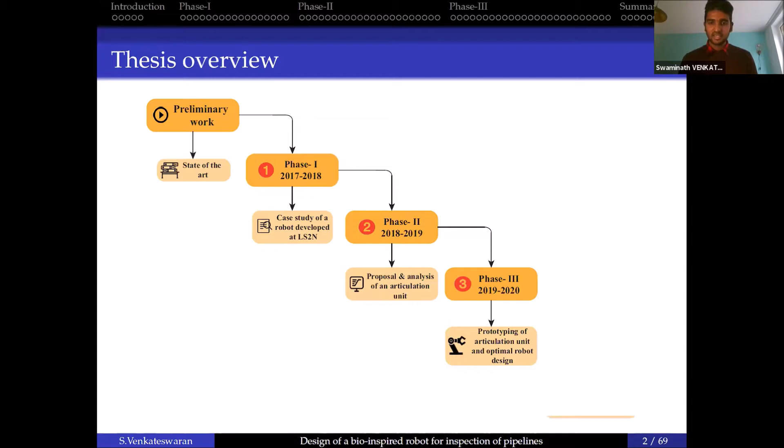This will be the outline of today's presentation. The thesis begins with preliminary work, covering the state of the art and mathematical concepts. This is followed by phase 1, a case study of a robot developed at LS2N in France. Phase 2 concentrates on the proposal and analysis of an articulation unit. Phase 3 concentrates on prototyping the articulation unit and the design of an optimal robot. Finally, the thesis ends with conclusion and future perspectives.

Generally, robots have an important application in industries such as automobile and manufacturing because they not only reduce human effort, but also perform tasks with better accuracy. Even in industries such as nuclear, chemical, and sewage, inspection robots play an important role for pipelines because they can do the task with accuracy, but also reduce long-term radiation effects or even reduce the loss of human life.

Generally, the architecture of a piping inspection robot comprises a head, a platform, and a cable. The head consists of devices such as a camera, and the platform houses all the equipment of the robot. Finally, the cables are used to transfer information from a central control system to the current position of the robot.

In general, a piping inspection robot is encountered by several scenarios such as diameter variation, a 90-degree bend, a 45-degree bend or elbow, a T-union or junction, or even the presence of deposits.

These inspection robots are associated with problems, namely movement inside pipelines—how accurately it's positioned on a given zone—and inspection of the desired zone, or even intervention on the desired zone by withstanding the load of the mounted devices. This thesis will mainly concentrate on addressing the first issue, associated with movement, and will look at the design of an inspection robot for diameters less than 150 millimeters that can adapt its structure to overcome scenario A and potentially overcome scenarios B to D, such as bends and junctions.

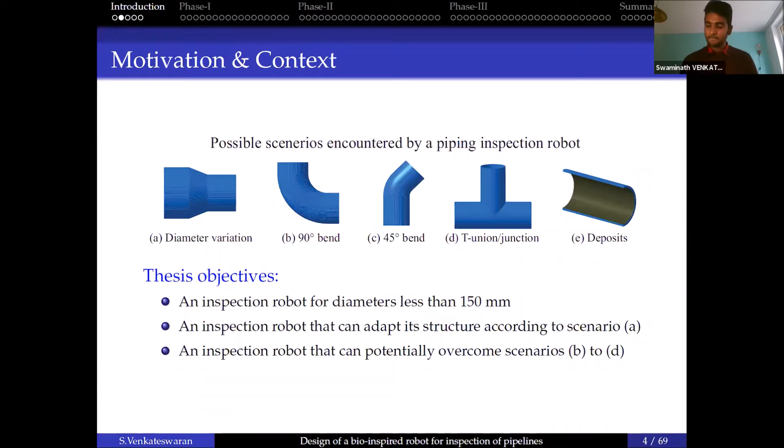Generally, the locomotion techniques of piping inspection robots can be classified via pig type, wheel type, wall press type, or screw type. Another interesting classification was proposed by Kasim, via mechanical and bio-inspired locomotion systems.

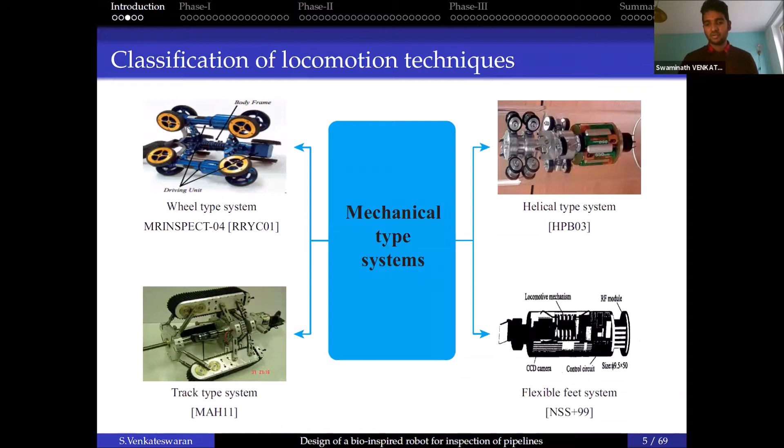Mechanical locomotion systems employ mechanical elements for accomplishing locomotion or contact with the walls of the pipeline. Examples include a wheel type system using wheels to contact pipeline walls, a track type system using a conveyor with pulleys and rollers, a helical type system exploiting screw motion to translate along a given pitch inside a pipeline, or a flexible feet system using a piezoelectric bimorph to accomplish locomotion.

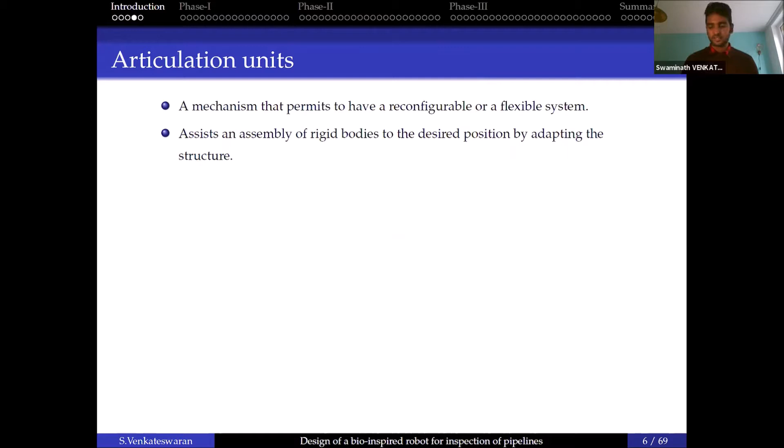And then we have something called articulation units, which is basically a mechanism that can permit a reconfigurable or flexible system. They assist assembly of rigid bodies to move to the desired position by adapting the entire structure. So these are some of the examples.

We have a universal joint, which is quite commonly found in robot manipulators or even piping inspection robots where it's actuated. It can help the assembly overcome a pipe bend at 90 degrees or pass through a junction.

And then we have a passive example like a spring, which is used to bend the entire robot assembly to overcome a pipe bend at 90 degrees, for example.

And then we have a flexible system, which is like the spring, but with higher load carrying capacities. It can be a flexible bearing or a flexible sleeve coupling—again, a passive solution to overcome a pipe bend or a junction.

And then we have another interesting example, which are tensegrity structures that employ bars in compression and springs in tension. They are basically lightweight mechanisms which can manipulate in a given environment or overcome an obstacle.

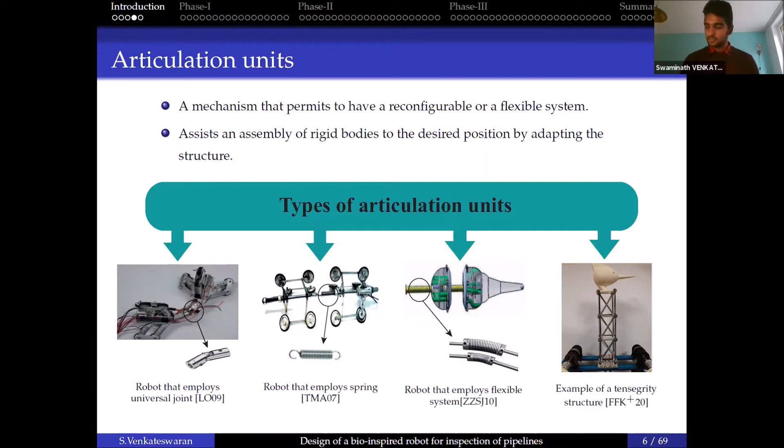Moving forward, phase one of the thesis concentrates on a rigid bio-inspired piping inspection robot, and it tries to address the following questions: how can locomotion be accomplished inside a pipeline, and what are the forces required to have good contact with the pipeline walls?

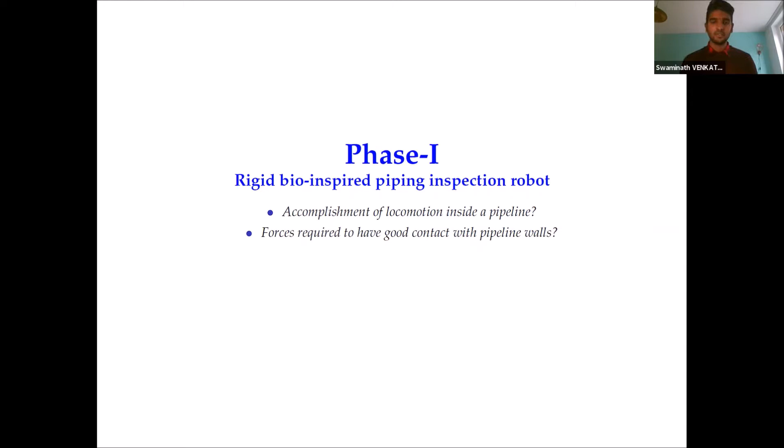In this context, a rigid bio-inspired piping inspection robot that moves like a caterpillar was developed as part of a research project back in 2014 at LS2N. By using leg mechanisms and DC motors, the robot accomplishes the locomotion of a caterpillar in six steps. As you can see, a small simulation here.

The problem is that the robot is a rigid model and cannot be used for pipelines having bends and junctions. Also, the velocities of the motors used are pretty low. Additionally, force models—namely static and dynamic—were not studied, and experimental validation was not carried out. So the last two points will be addressed in this phase of the thesis.

So these are the representations of the various modules on the digital model of the robot. We have rear and front leg modules, which comprise 3 legs at 120 degrees out of phase, and they try to establish contact with the walls of the pipeline. And then a central module, which takes care of elongation and retraction, eventually arriving at the locomotion of a caterpillar.

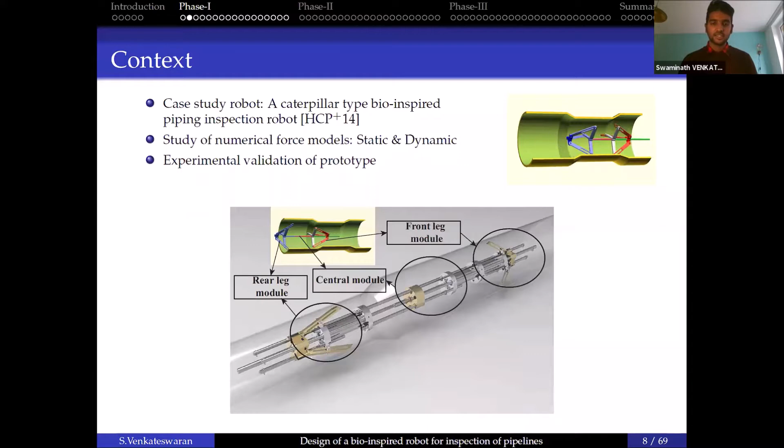Moving on to the force models: basically static and dynamic force models are developed for this robot. Generally, when the robot is under locomotion, we can have 2 types of models.

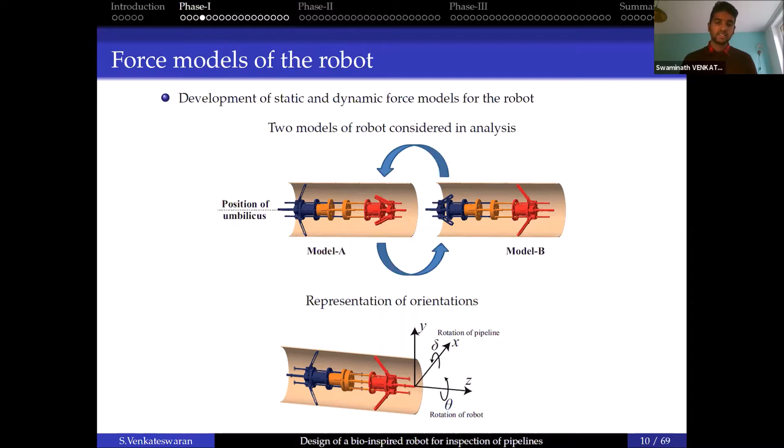For the static force model, we begin with a wrench model, which comprises the force vector and the moment vector. The force vector consists of radial forces and longitudinal forces. For estimating the torques at the central point, we use Varignon's moment transport rule, which states that the total moment acting at a point is equal to the sum of moments at each point.

We estimate the normal forces, which are the contact forces, based on Coulomb's law of dry friction, using the radial and longitudinal forces and the coefficient of friction between bronze legs and steel walls of the pipeline. The actuator forces are then estimated using the force transmission factor relation shown here.

Then we have the dynamic force model, used to estimate the forces on the actuators and the locomotion. The initial analysis was done by Frederick Boyer using the recursive Newton-Euler algorithm. This is the general representation of the various body parts of the robot, comprising around 29 bodies with non-zero masses, active links, passive links, and some clampings.

And this is the bill of materials used, for example steel material for the actuators, bronze for the legs, and copper for the cables.

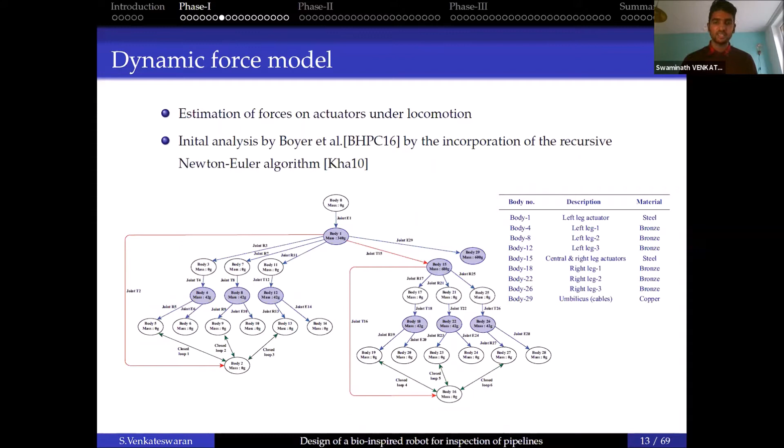Similarly, we have a velocity component equation in the dynamic force model, which is a function of the homogeneous transformation matrix. Then we have a wrench model comprising the forces and moments, which are functions of the inertial matrices. Eventually the motor torques are computed using the wrench model as well as the Coulomb and viscous friction parameters.

Moving to the results, the longitudinal and radial force equations are estimated using software such as Maple. For the simulation, we consider a straight pipeline with two diameters, 54 and 74 millimeters. Here W indicates the self-weight of the robot, measured from CATIA, not taking into account the weight of the cables.

As I said earlier, when one set of leg mechanisms has contact with the pipeline walls and the other end is free, owing to the self-weight of the robot, a moment is induced at the fixed end. This moment is caused by the self-weight of the robot, which acts at a distance of the center of gravity from the clamped end.

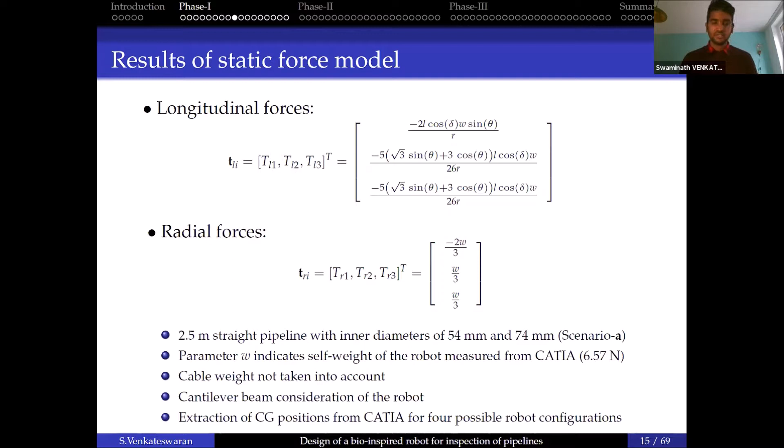We can have four possible configurations of the CG position, measured from CATIA as a function of the diameter of the pipeline, and also as a function of the position of the central actuator, which can be either fully extended or fully retracted. We also calculate the force transmission factor for the two diameters considered, 54 and 74.

For the results of actuator forces, for the smallest diameter pipeline, when the orientation is vertical, the forces are almost constant and pretty low because only the radial forces exist, and the longitudinal forces do not exist because they depend on the orientation of the pipeline.

Whereas if the orientation is horizontal, the highest amount of force was measured on the central actuator extended position, around 70 Newtons, and we observe a variation of this force. It's because of the orientation of the robot about its own axis, which can go from 0 to 2 pi radians. The highest forces were observed on the 74 mm diameter pipeline, because it depends directly on the force transmission factor, with values around 120 Newtons.

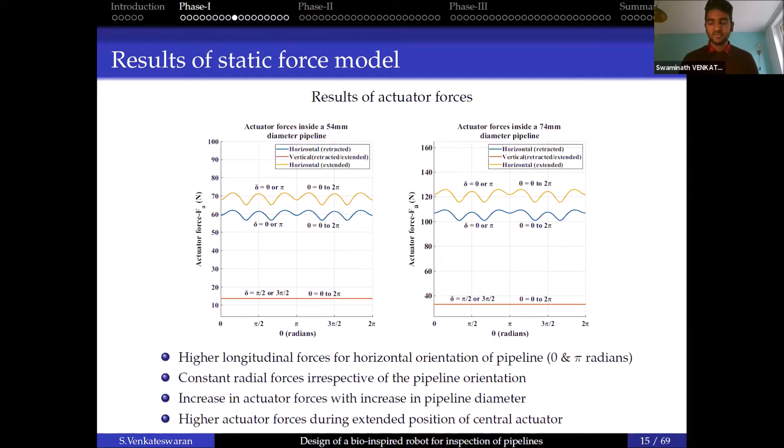Moving to the dynamic force model, trajectory planning is performed using the fifth degree polynomial equation to arrive at the displacement, velocity, and acceleration profiles. The total time taken for the simulation is around 5,500 seconds, owing to the low velocity of the motor units, around 0.43 millimeters per second, and eventually very low values of acceleration.

Then we have the results of forces on each actuator under locomotion. For model A, when the orientation is horizontal, the forces on the central actuator are pretty close to zero, however the leg actuator forces range between -4 and 4 Newtons. It's the same case for model B when the orientation is horizontal.

However, in the case of vertical orientation of the pipeline, the central actuator forces are pretty much on the higher side, around 8 Newton, mainly caused by gravity. But in the case of model B, the forces on the central actuator were around 10 Newton, mainly caused by the presence of the umbilicus that imposed a slight load on the robot.

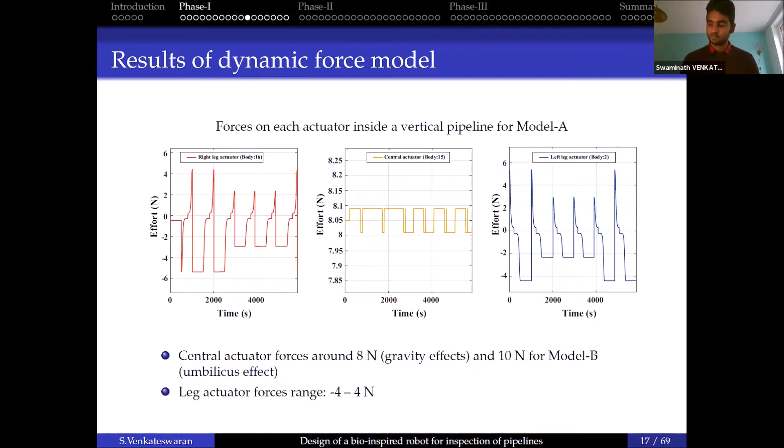However, the leg actuator forces remain the same irrespective of the orientation of the pipeline for the dynamic force model. So to compare, the static forces were found to be pretty much higher than the dynamic model, mainly due to the low velocity of the motor units and low inertia of moving masses.

However, the dynamic model helped in identifying the forces on the central actuator, which was not possible in the static model. The static force model results were then used as inputs for accomplishing clamping phases during the experiments.

A prototype of the robot was realized by assembling DC motors, servo controllers, fasteners, and connecting elements. An interface was established between the servo controllers and motors using a BeagleBone Black microcomputer, where a force control algorithm is written to apply duty cycles using PWM and GPIO cycles.

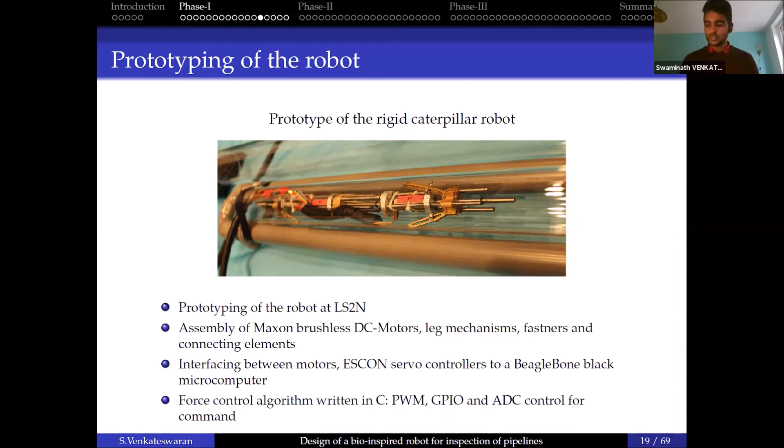We apply a threshold to attain static clamping phases during locomotion. The experiment was carried out inside a 74 mm straight pipe made of transparent PVC material, 2.5 meters long. Initially, output voltages were measured from the ADC and sent to the user, from which we can calculate the current.

It was observed that a lot of noise was present, mainly due to numerical errors associated with the BeagleBone Black card and also some frequency issues. A filtering technique called Savitzky-Golay, which uses a least square approximation to smoothen signals without distorting them, was employed to reduce the noise.

With the current data, we can estimate the torques and forces based on the relation with the torque constant. The spindle drive forces were estimated for horizontal and vertical orientations of the pipeline.

It was found that at the starting and ending of each phase, higher forces were observed, mainly because a constant velocity profile was employed in the control law. Also, slightly higher forces were observed in the vertical orientation of the pipeline, mainly due to the effect of gravity.

Using the actuator forces, we can calculate the clamping force based on the relation with the Jacobian matrix, and it was found to be around 630 newtons, which was pretty much higher than the static model.

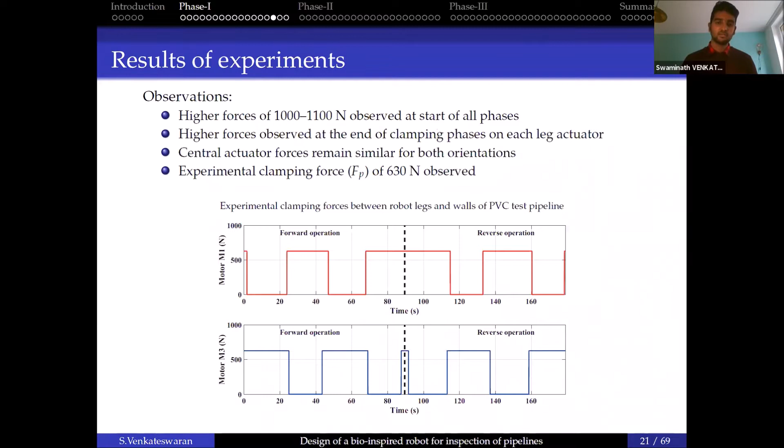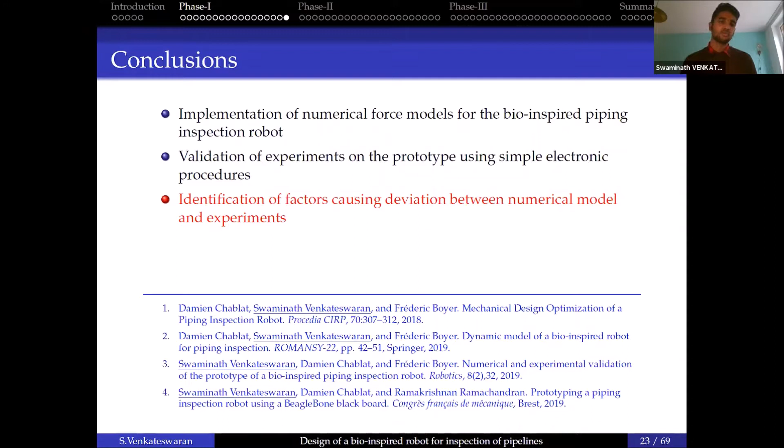Some factors were identified that caused deviation between the numerical and experimental results, mainly due to electromechanical and frictional effects, which were not possible to consider in the numerical model.

It was also possible to identify a robot which can potentially operate within a pipeline having diameters less than 150 millimeters. Below you can see some contributions at the end of this phase.

Moving forward to phase 2, it concentrates on the design and analysis of a tensegrity mechanism, and it tries to address questions like: what are the issues to overcome a pipe bend and junction, and what is the design of an articulation unit that can have stability and considerable tilt limits?

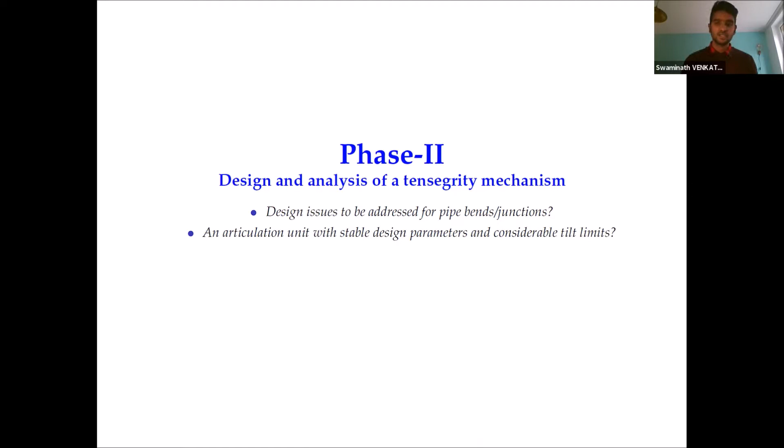As said earlier, the problems with the existing prototype are rigidity, unaddressed cable management issues, and low velocity. In this phase, we try to address the issue of rigidity by converting the system into a flexible system through the design and analysis of an articulation unit.

Before going into the design, some factors must be considered for overcoming pipe bends and junctions. The first is passive compliance, imagined for a robot passing through a 90-degree pipe bend, where it is essential for the articulation unit to be in passive mode. Then there is active compliance, imagined for a robot passing through a T-union or junction, where the articulation unit must be necessarily actuated.

Then we have the tilt limits: the maximum angle up to which the robot's articulation unit can bend to overcome a pipe bend or junction.

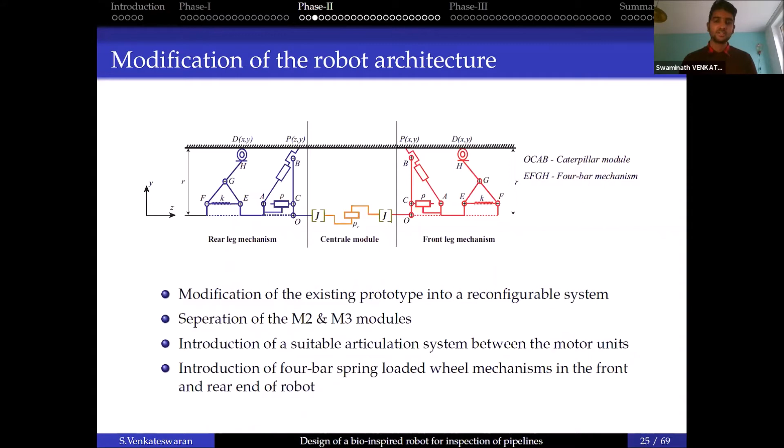So the existing architecture of the robot is modified into a reconfigurable, flexible system by incorporating articulation units between each module, and also a 4-bar wheel mechanism was proposed for the front and rear ends of the robot, which can potentially assist it to enter and exit pipe bends smoothly.

Taking into account all these factors, a tensegrity mechanism employing 3 tension springs and a universal joint was proposed as an initial solution for an articulation unit for the bio-inspired robot.

Under passive mode, the mechanism will operate autonomously to overcome a 90-degree pipe bend. In the case of active compliance, cables passing through each spring of the mechanism can be actuated to tilt the platform of the mechanism to overcome a pipe bend or junction.

This mechanism is correlated to a 3-SPSU parallel manipulator to arrive at the geometrical equations, and two analyses are being carried out. The first one uses the theory of tilt and torsion to analyze the joint limits, and the next one concentrates on the study of singularities and workspaces for the Euler angles of the universal joint.

The first concept concentrates on the theory of tilt and torsion, which is employed in parallel kinematic machines where the mobile platform is usually symmetric. So by projecting the tilt and azimuth angles of the universal joint, the transformation matrices are determined.

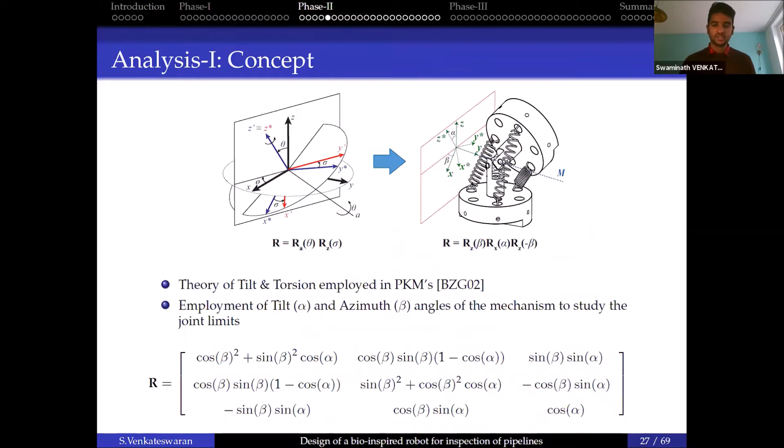Since we have a parallel mechanism, the inverse kinematic problem is pretty much simpler, which is used to map the base to the end effector by using the distance relations. So these are the results of IKP for the theory of tilt and torsion.

For the positioning of the end effector about the central axis of the universal joint, it is affected by the value of parameter gamma, based on which we can have three steady postures.

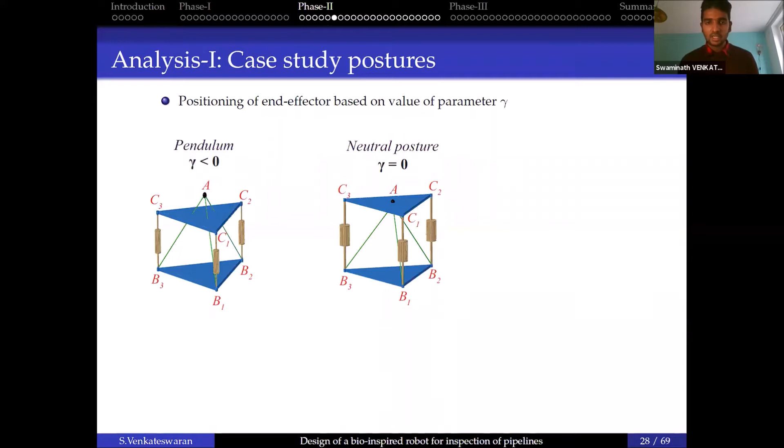The first one is called the pendulum, where the value of gamma is less than 0, or negative. The next one is called the neutral posture, where the value of gamma is 0. And the next one is called the inverse pendulum, where the value of gamma is greater than 0, or positive.

For the analysis of this mechanism, we use the Siropa library of Maple to create the manipulators, transform the inverse kinematic problem into constraint equations, and extract feasible workspaces using CAD. CAD is an important tool employed for symbolic computations in the field of engineering and mathematics, and it comprises decomposition of space into a collection of cells and projection of each cell for a given variable, where each cell is described by a set of polynomial equations.

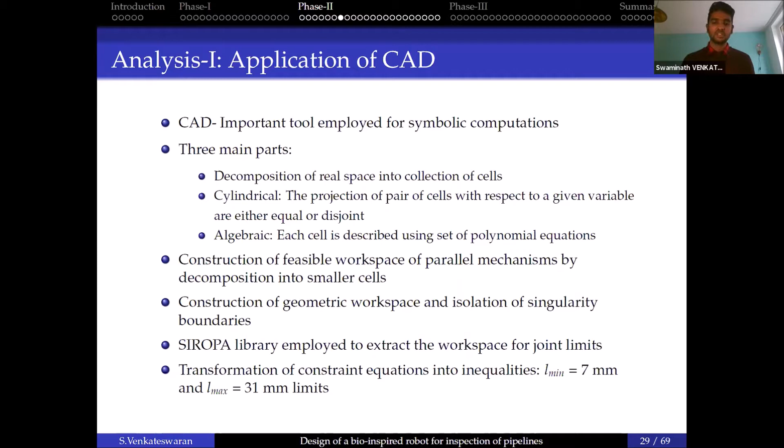For parallel mechanisms, these tools are used to study the feasible workspaces and also isolate the singularity aspects. The constraint equations are transformed into inequalities using Siropa by setting joint limits that go from 7 millimeters to 31 millimeters. So these are the results obtained.

For the pendulum configuration, the value of alpha is around plus or minus pi by 18 radians, which is very narrow. However, in the case of neutral pose, the results are considerably better, around plus or minus pi by 6 radians. And in the case of inverse pendulum configuration, the results are even better, found to be around plus or minus pi by 3 radians.

So we just stick with the inverse pendulum configuration for further analysis.

This is a small simulation of the theory of tilt and torsion on the three configurations. As you can see, a tilt is applied, an azimuth from 0 to 2 pi to have a complete rotation. And once again, another tilt and an azimuth to rotate the mechanism.

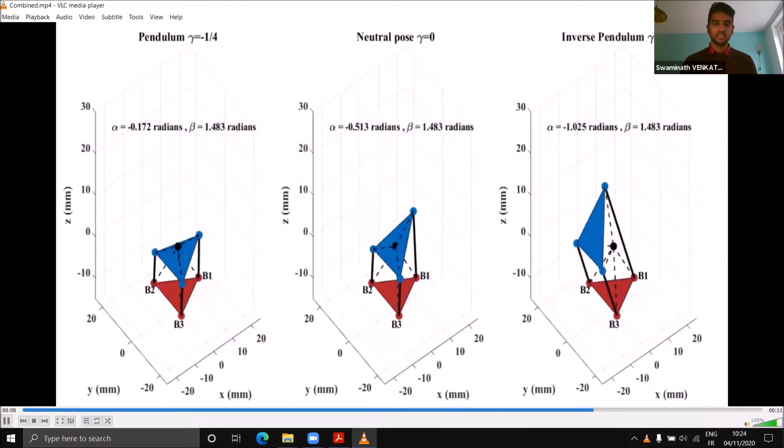Since an inverse pendulum configuration was chosen, by nature the inverse pendulum is unstable. So in order to ensure that we have a stable configuration, stability analysis must be done, for which the Lagrange equation of motion is used under static modes.

Under static modes, it's only the potential energy that exists, and it is mainly contributed by the presence of cables and springs. So in order to have a stable condition, the second order derivative of the potential energy, also called the mechanism stiffness, must be positive.

Initial analysis was done by considering fixed design parameters, such as the value of H fixed at 1, and it was found that an unstable configuration was obtained.

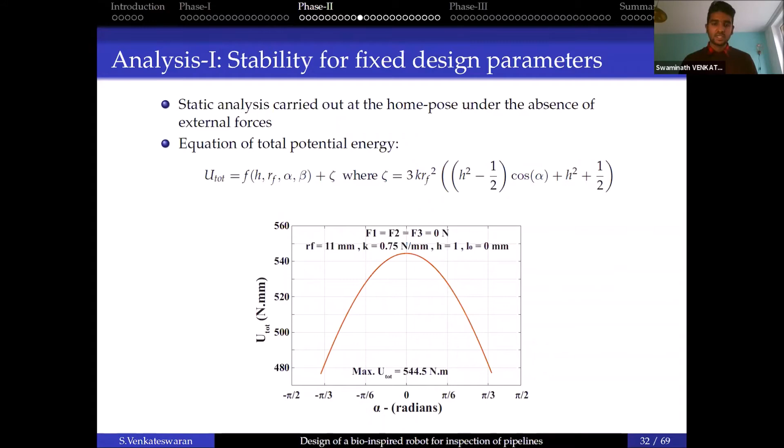For finding the stable configuration, the second order derivative of potential energy is studied at the home pose, where the tilt angles are 0. A trace is created between the mechanism stiffness parameter H and the value of RF. The value of H equal to 0.5 is chosen from the trace, where a stable configuration could potentially be obtained. The workspace analysis is then re-verified, and the tilt limits are seen to be considerably reduced, from pi by 3 to pi by 6 radians.

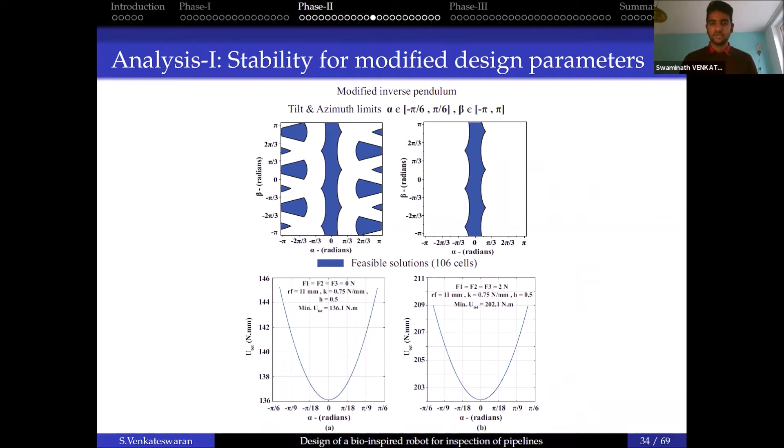The advantage is that even with no preload, we can have a stable configuration, and if we apply a preload of 2 Newton on each spring, we can also achieve a stable configuration. Since the tilt limits are considerably reduced, one solution could be to go for a stacked model, in case it's implemented for the bio-inspired robot to overcome a pipe bend at 90 degrees or even a junction.

The theory of tilt and torsion gave insight about identification of case study postures, but to really study the workspaces, the singularities must be verified. This has to be done for the Euler angles of the universal joint. Since we have a parallel mechanism, we can have the possibility of three types of singularities.

The first is type 1, which can exist when the determinant of the inverse Jacobian matrix becomes 0. A type 2 singularity occurs when the determinant of the direct kinematics matrix becomes 0, and type 3 occurs when the determinants of both matrices become 0.

Since the 3-SPSU mechanism has 3 joint variables and 2 articular variables, which do not yield a perfect square matrix, the mechanism is split into 3 sets of 2-SPSU architectures for analyzing the singularities. Type 1 singularities can only exist if one of the lengths of the prismatic springs becomes 0, which is not possible. However, type 2 singularities can exist when one of the design parameters or the tilt angles becomes 0, which is highly possible for this configuration.

By setting joint limits and creating the inverse kinematic problem, these are transformed and set as inequalities for the CAD algorithm. Initial joint limits were set at 10 to 30 millimeters, from which the regular workspace, in the form of a triangle, is extracted, leading to modification of the joint limits to 13.5 millimeters.

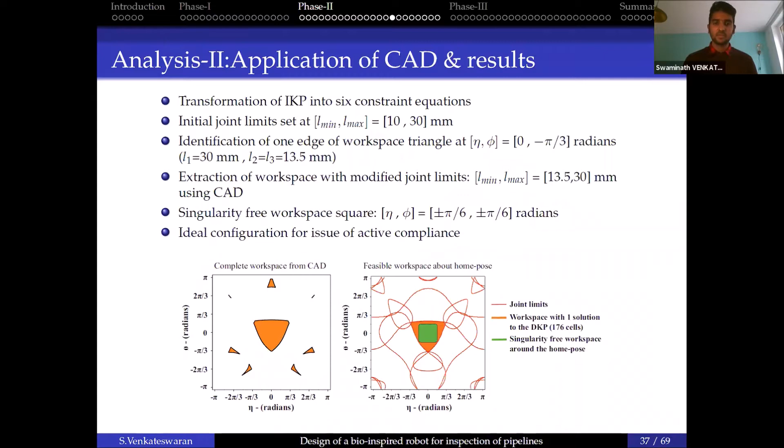Since we have very narrow tilt limits with the 3-SPSU mechanism, and it couldn't address the issue of passive compliance, we add another tension spring to the mechanism, converting it to a 4-SPSU configuration. This is correlated to a 4-SPSU type parallel mechanism to arrive at the geometric equations, and singularity analysis is carried out to identify the feasible workspaces.

This configuration could be a potential candidate for addressing the issue of passive compliance, and also active compliance if actuated.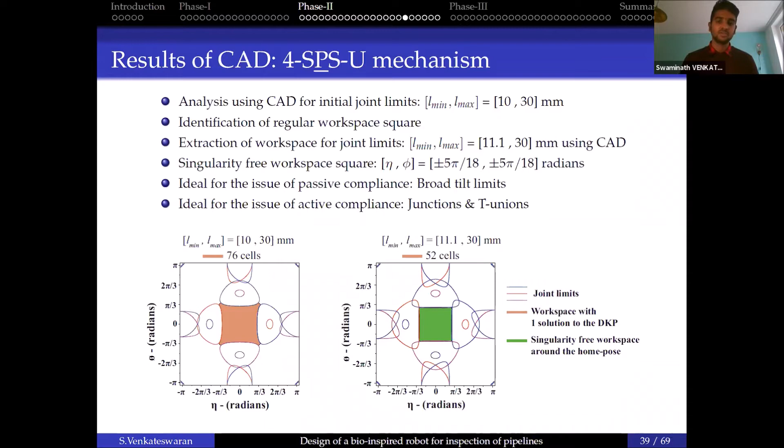Earlier, the tilt and torsion theory was used to study stability. Here we once again revisit the stability analysis for the Euler angles of the universal joint. Similarly, for fixed design parameters, especially for h equal to 1, it was found that the mechanism remains unstable even in the presence of a preload.

Since for the Euler angles the mechanism depends on both tilt angles, a stable condition is only possible when the determinant of the Hessian matrix is positive, and the second order derivative of the potential energy with respect to one of the tilt angles is positive.

In order to identify the optimal configuration, a simple optimization approach using a genetic algorithm is carried out with the presence of preload, which tries to maximize the second order derivative of the potential energy with respect to one of the tilt angles, subject to the constraints that the determinant of the Hessian is always positive and the objective function is positive, where the design variables are the parameter h and the spring stiffness k, for a fixed value of RF equal to 11 millimeters.

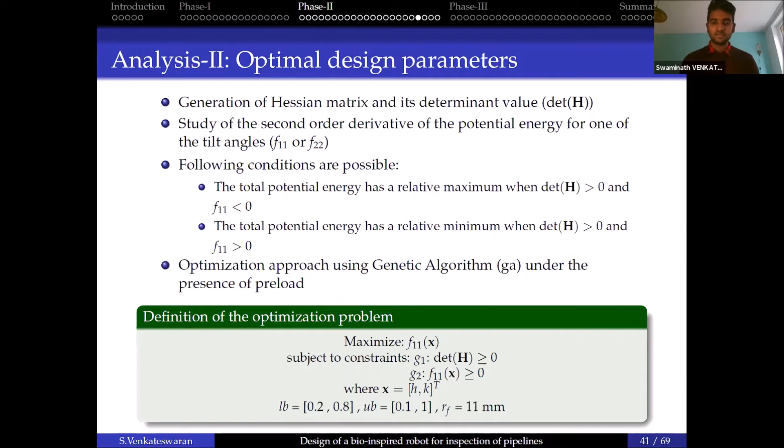From the results of the genetic algorithm, a swarm of solutions was obtained under the presence of preload of 2 Newtons along each spring for the 3-SPSU architecture and 1.5 Newton along each spring for the 4-SPSU mechanism. A common value of h equal to 0.6 was chosen to compromise between both architectures, and a k corresponding to 0.75 Newton per millimeter was chosen, which is a standard size available in the laboratory catalog.

The stability analysis was once again re-verified for the modified design, which led to the conclusion that a stable configuration was obtained for both mechanisms under the presence of preload.

A simple prototype of the 3-SPSU architecture was built. With h equal to 1, we see an unstable configuration under static modes. However, with h equal to 0.6, we obtain a stable configuration.

Since the value of h was modified, the workspaces were recalculated. It was found that the joint limits changed from 6.5 to 30 millimeters, and the singularity-free workspace for the 3-SPS-U mechanism was identified to be around plus or minus 2 pi by 15 radians, much lesser than the earlier results.

For the 4-SPS-U architecture, the joint limits were modified to 5.3 to 30 millimeters, and the singularity-free workspace was found to be around plus or minus pi by 4 radians, which is considerably better than the 3-SPS-U mechanism.

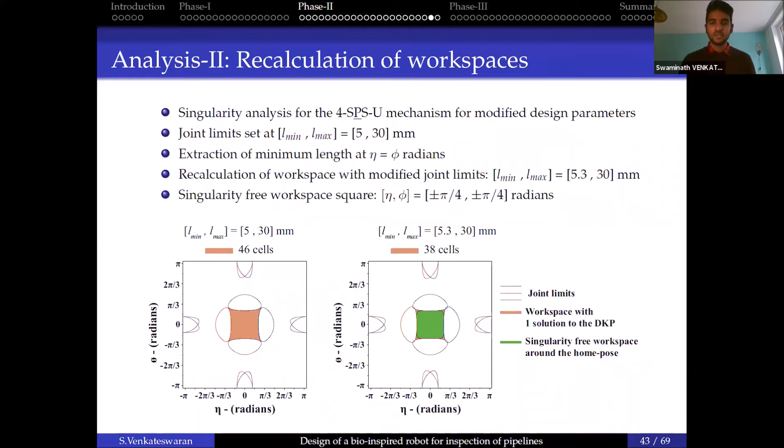To conclude this phase, it concentrated on the proposal of tensegrity mechanism as an articulation unit. The first analysis concentrated on the theory of tilt and torsion for identifying the best posture.

The second analysis focused on the singularity analysis for the initial 3-SPS-U mechanism and the modified 4-SPS-U mechanism. Eventually, stability analyses were carried out to determine the stable configurations, leading to the conclusion that 4-SPS-U is an ideal candidate for addressing the issue of passive and active compliance.

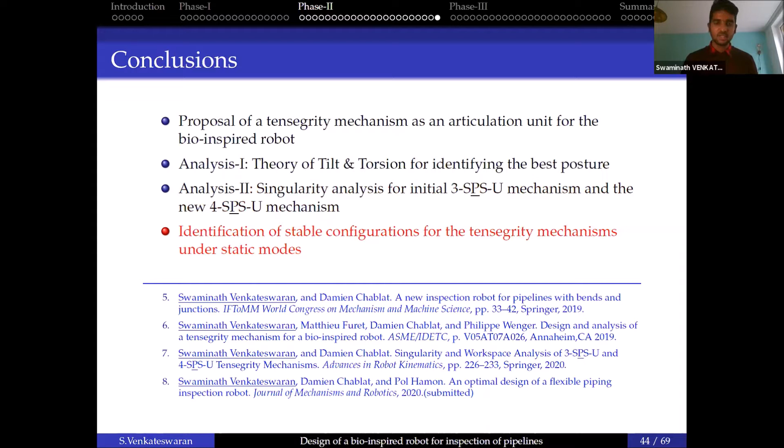However, the 3-SPS-U can hold good only for the issue of active compliance. These are some of the contributions at the end of this phase.

The third phase of the thesis is split into two parts. The first part concentrates on experiments with the 3-SPS-U tensegrity mechanism, addressing questions like motion planning and tilting of the mechanism to solve the inverse kinematic problem. We demonstrate the issue of active compliance where the IKP is solved for input tilt angles.

Similarly, a force control algorithm is applied to achieve static phases at the end of a cycle. Two types of trajectories, linear and circular, are performed for horizontal and vertical orientations of the mechanism, and a PID control law is employed to have a closed loop feedback system.

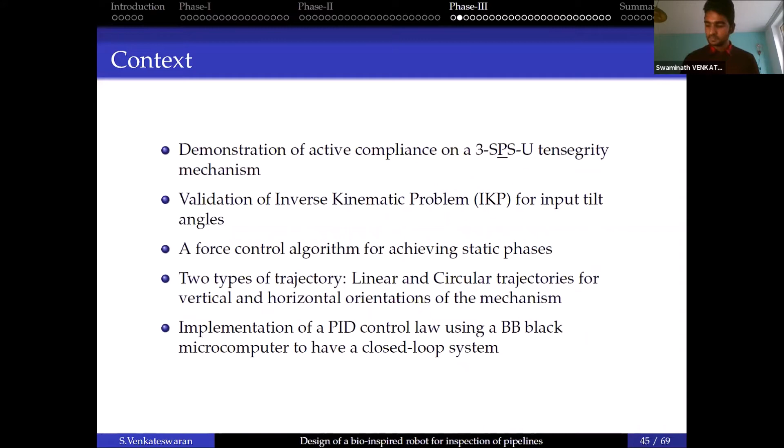This is the prototype demonstrated earlier. It comprises a standard universal joint of 68 millimeters, with design parameters identified based on the stability analysis and the inverse pendulum configuration. It is basically a scaled up model compared to the real prototype.

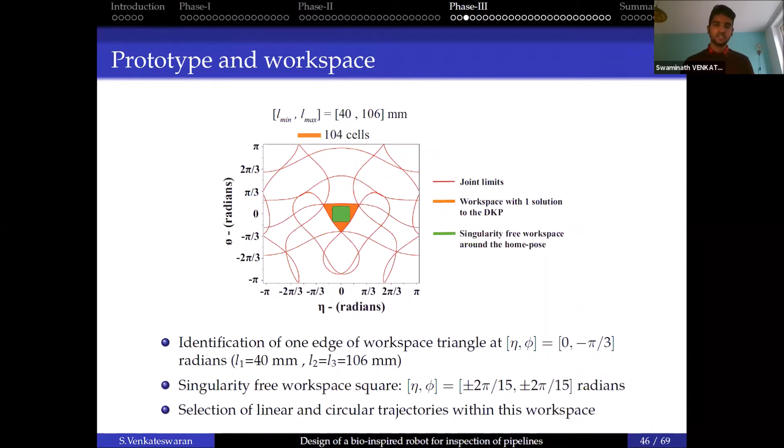Since we have a scaled up model, we re-verify the workspace analysis. The tilt limits remain the same, but the joint limits are modified from 40 to 106 millimeters.

This is the experimental setup. The left side is a vertical setup and the right is horizontal, corresponding to the vertical and horizontal orientations of the bio-inspired robot when it is moving inside a pipeline.

The actuation is carried out using a DC motor coupled with a planetary gear train of very high gear reduction. The interfacing between the motors and the controllers is done using the BeagleBone Black microcomputer, applying duty cycles using PWM and GPIO. We also use the quadrature encoders for transmitting angular position information to the user.

For the trajectory planning, tilt angles are passed as input to solve the IKP. Desired positions can be calculated using the IKP, and the measured positions using the gear reduction ratio, the encoder channels, and the encoder information data.

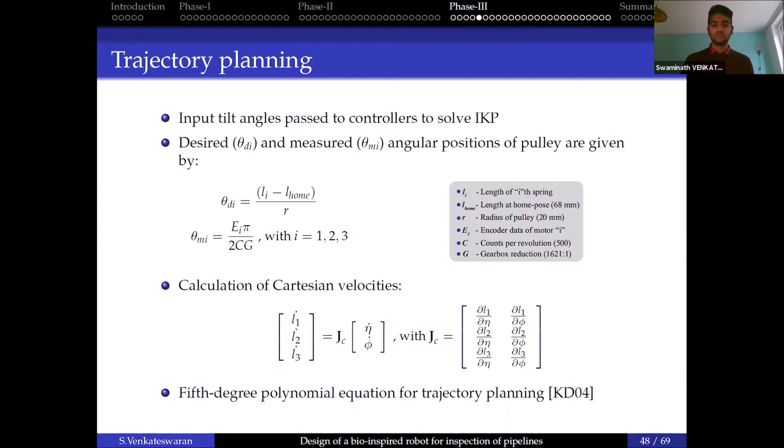The Cartesian velocities can be estimated as a function of the Jacobian and the joint velocities. Similarly, the 5th degree polynomial equation is employed for trajectory planning, as mentioned earlier for the bio-inspired robot.

So for this linear trajectory, initially we calculate the minimum time required for performing the experiments, which is a function of the position vector and the velocity and acceleration of the motor. The estimation of intermediate position, velocity, and accelerations are done using the polynomial equations. Eventually, the joint positions, velocities, and accelerations are computed using the IKP, the Jacobian matrices, and its time derivative.

For the circular trajectory, the calculation of minimum time is a bit different as it depends on the ratio of maximum velocity to the speed of motor. The position vector is also a bit different as it has sinus and cosinus dependencies of the circular path. Similarly, the velocity and acceleration vectors are determined as time derivatives. Eventually, the joint position, velocities, and accelerations are computed using the same relations as shown in the linear trajectory.

So we have a PID control system, which is used to calculate the motor torques, which is a function of the inertia, the three constants of PID: the proportional, derivative, and integral terms. These constants are estimated as a function of the motor inertial parameters, the resistance of motors, and also dielectric constants.

So we have a closed loop feedback system where the desired position is sent to the Beaglebone Black, and the measured positions are sent back as feedback to the Beaglebone Black. Using the proportionality constants, proportional integral derivative terms, the torque is regulated and eventually sent to the user.

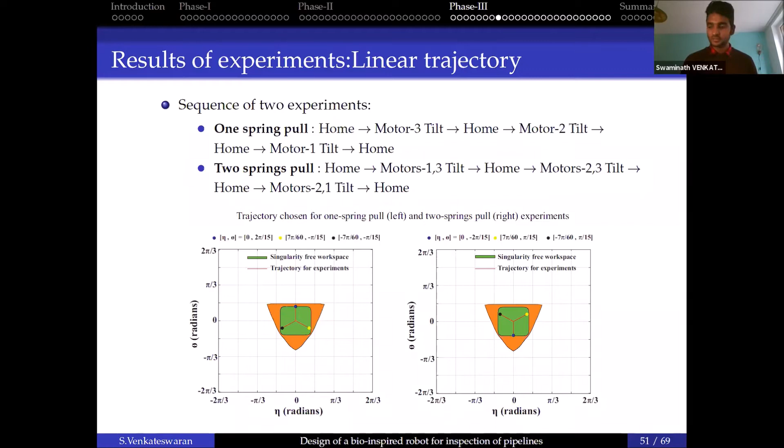Before going into the experiments, the travel time must be determined, which is used as input in the control law. So 6 cycles are carried out in total, and it is around 9 seconds per cycle, which yields 54 seconds for carrying out the one spring pull, as well as for the two springs pull experiments.

And these are the results obtained for the one spring pull. The total time taken is around 128 seconds against 54, mainly due to the sleep routines induced in the control law. These are the positions of joints for the one spring pull experiments for both orientations, because more or less they both look similar.

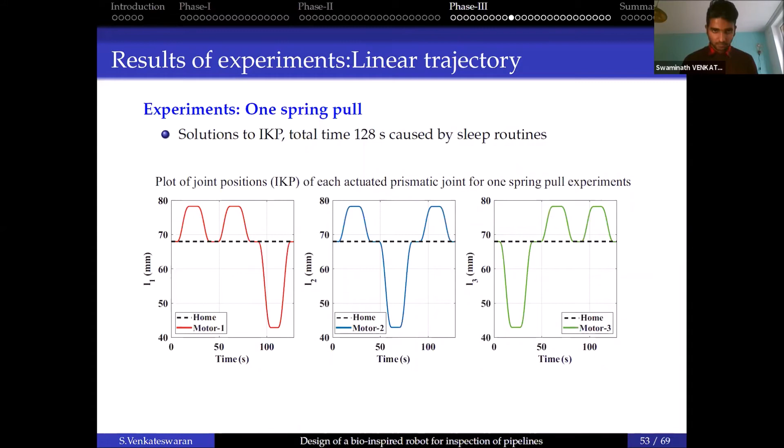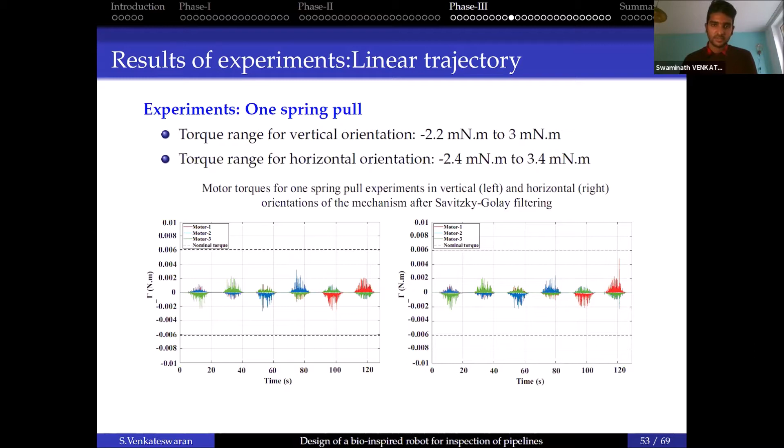Similarly, the torque values are also computed at the motor end after the filtering technique. It was found that for the vertical orientation, the torques are around -2.2 to 3 millinewton meters. In the case of horizontal orientation, owing to the self-weight of the robot and also gravity effects, a slight amount of torque increase was observed, around -2.4 to 3.4 millinewton meters.

So after the linear trajectory, the circular trajectory experiment is performed. Before a circular path is carried out, a linear tilt along one of the motors must be done. Then the circular path is carried out, and once again a linear tilt to bring the mechanism back to its home position.

Also during the linear trajectory experiments, when the tilt angles were chosen at the boundary, a slight movement of the base was observed. So a value less than the singularity boundary is chosen, around pi by 10 radians for the circular trajectory.

Similarly, we calculate the theoretical curves. For the linear tilts, the time is still 9 seconds. However, for the circular path, it's around 35 seconds. So the total theoretical time is around 53 seconds.

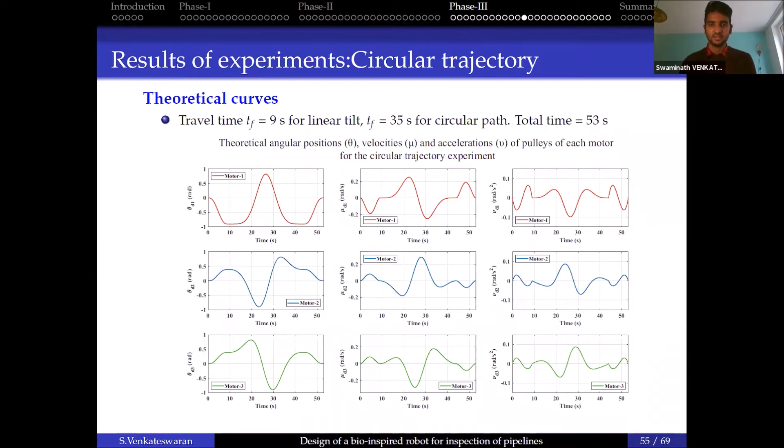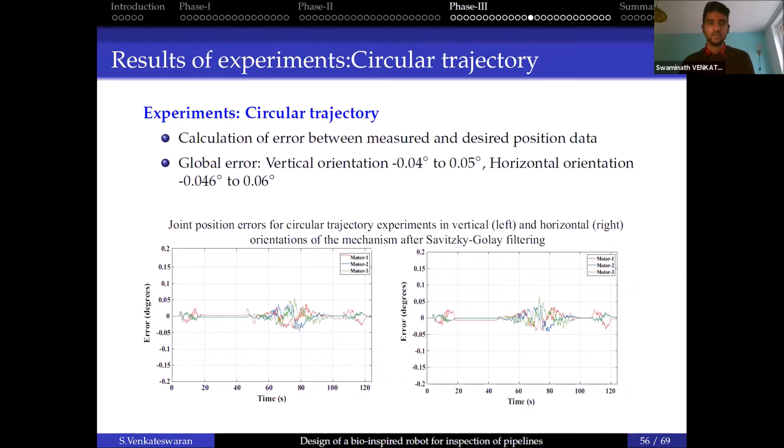Similarly, the error is calculated by the application of numerical filters, and it is found to be around -0.04 to 0.05 degrees for vertical, and -0.046 to 0.06 for the horizontal.

So to conclude, this chapter presented the actuation strategy of the 3-SPS-U mechanism under no external loading. Linear trajectories were performed with one spring and two springs pull, and eventually a circular trajectory to have a correlation with the theory of tilt and torsion. Also, the error between the measured and desired data was very much less.

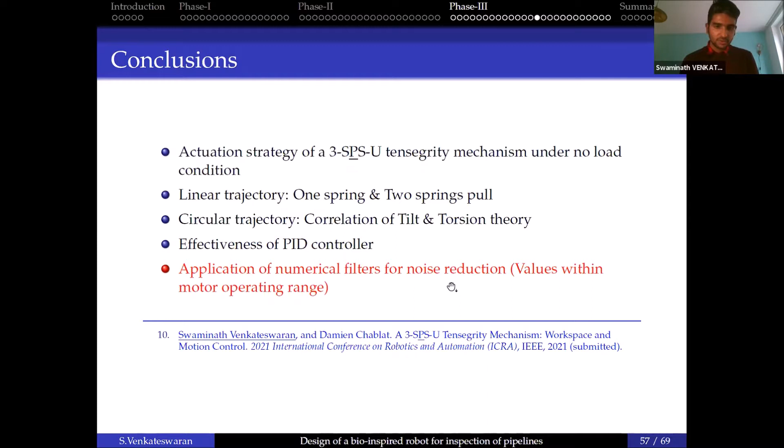This proved the effectiveness of the PID controller. Eventually, by application of numerical filters, the motor torques were also identified, and it was found that they are well within the operating range specified in the catalog. This is one of the contributions of this phase.

The second phase of the second part of phase 3 concentrates on the optimal design of a piping inspection robot that can address questions like what is the sizing for passing through a 90-degree pipe bend, and what is the sizing of leg mechanisms that could be accommodated for the robot.

So an optimization approach is being implemented to determine the optimal sizes. Two problems are being solved, where the first one aims to determine the size of motors without the leg mechanisms, and the second one tries to determine the size of leg mechanisms for the results of the first optimization problem.

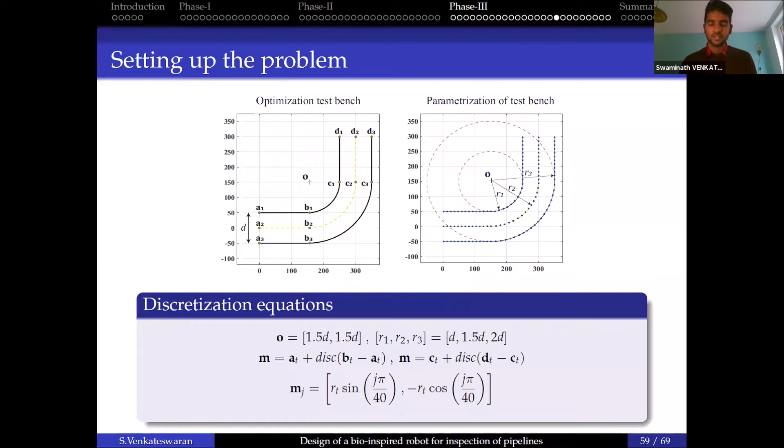This is the optimization test bench, which is basically a 90-degree pipe bend. It's only the issue of passive compliance which we consider here. This pipeline is constructed in MATLAB by discretization equations, and we have three portions of pipe: the inner portion, the outer portion, and the central line radius, or CLR.

For the first optimization problem, which considers only the motor units, the motors are constructed as rectangular blocks using MATLAB, where the design variables are the length and width of the motor on the screw unit, with the tensegrity mechanisms in between, where rotation angles are applied to overcome or pass through a 90-degree bend. The dimensions of the tensegrity mechanisms are considered fixed because the optimal dimensions were already identified in the earlier phase through the stability analysis.

So the objective function for the first optimization problem is a simple mono-objective problem, which aims to maximize the area of each module for each displacement on the CLR. For ease of calculations, the central module is assumed to be at fully extended phase.

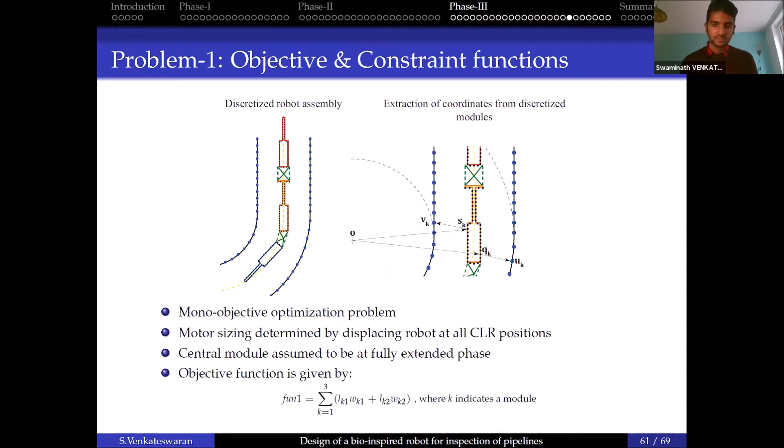At each position of the robot on the CLR, collision is verified for each module against the inner wall and the outer wall. Since we have 3 modules and 2 portions of pipe, we have 6 inequality constraints in total that will be ensured in the optimization algorithm.

The first optimization problem is defined, which aims to maximize the objective function subject to the 6 inequality constraints, with the design variables being the motor length and width parameters. These are set based on the catalog products of Maxon, like Hall sensor availability, maximum length of screw, and also the diameter of the screw length.

The simulation was carried out for pipeline diameters starting from 70 to 160 millimeters. Based on the results, the catalog products of Maxon were identified for each diameter, where in the first table, green indicates optimal sizing, gray indicates undersizing, and red indicates oversizing.

Based on these results, the 100 to 120 mm diameter range was chosen, as shown in the second table, owing to factors such as gear reduction ratio, feed force, efficiency, and length factors, which could be important when accommodating the slot follower leg mechanisms.

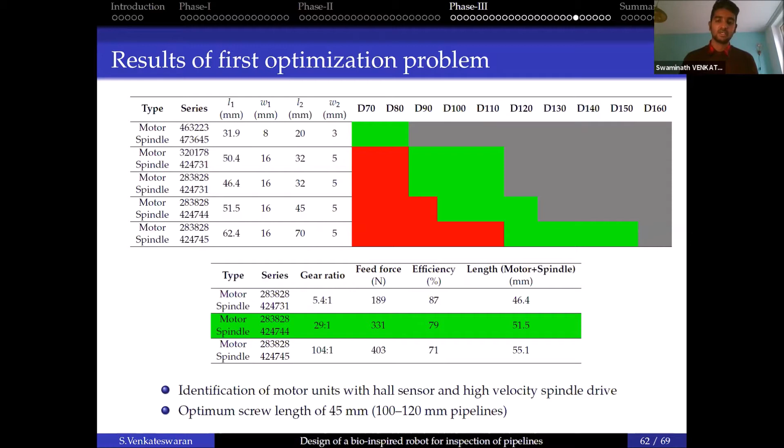With the results of the first optimization problem, the second optimization problem is carried out, which aims to identify the sizing of leg mechanisms. The geometry of the leg mechanism is split into rectangular and triangular sections, considered to be in the fully declamped phase.

Since the orientation of the robot about its own axis is unknown, a projection similar to the second figure at the bottom is chosen for easier computations and simulations.

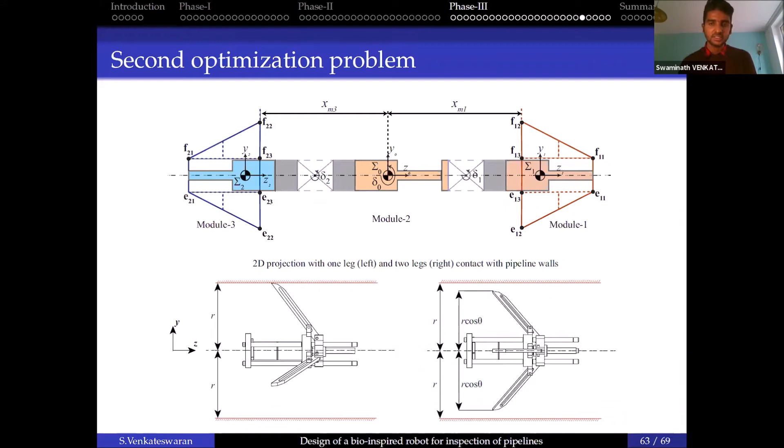This is the geometry of the leg mechanism for declamped and clamped phases, and the necessary design parameters such as the length of the leg mechanism and the horizontal and vertical space factors are taken as design variables. We also have offsets caused by spaces used for the assembly of leg mechanisms on the robot.

Similarly, we have a mono-objective optimization problem which aims to maximize the area of the leg mechanisms. The central module is not taken into account because we do not have any leg mechanisms attached to it.

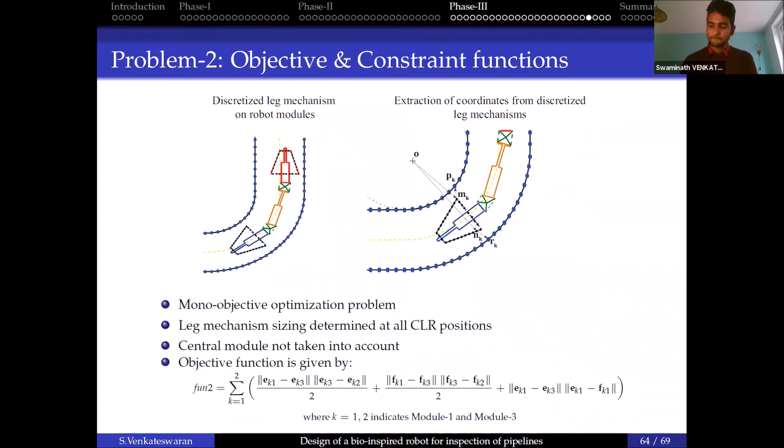Once again, we have a constraint which tries to avoid collision of the leg mechanism geometry with the pipeline walls. Since we have only 2 modules, we have a total of 4 inequality constraints, with the central module not taken into account.

Eventually we have 2 equality constraints because the length of the leg mechanism remains the same during clamped and declamped phases, so we have a correlation between them.

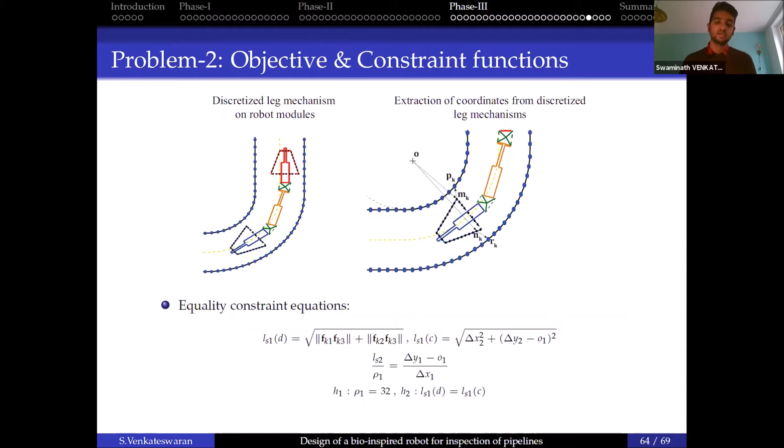The stroke length of the leg mechanism at the declamped phase is set as 32 against 45 millimeters because we have spaces present for assembly.

We then define the second optimization problem, which aims to maximize the objective function subject to the 4 inequality constraints and the 2 equality constraints.

We find that the lengths of the leg mechanisms are slightly higher than the existing prototype, because of the diameter range being considered for the pipeline.

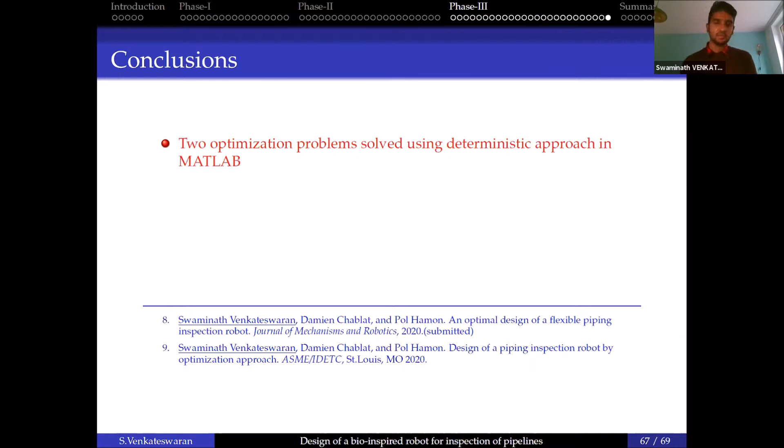To conclude, 2 optimization problems were solved using a deterministic approach in MATLAB. The first problem helped in identifying a motor unit that would be compatible for the 100 to 120 millimeter diameter pipeline.

A slot follower leg mechanism was identified that could potentially be accommodated for the 100 to 120 millimeter pipeline range. Eventually, a digital model of the robot was realized in CATIA, not represented here, just to give an idea of how the robot displaces inside the pipeline.

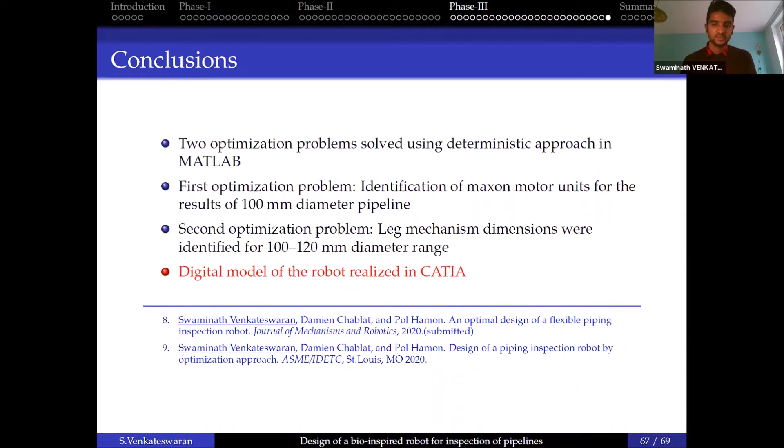To summarize, this thesis presented the design of an inspection robot for pipeline diameters less than 150 millimeters. The first phase concentrated on a rigid bio-inspired piping inspection robot, which proposed numerical models and validation, and then validation of experiments, especially contact forces.

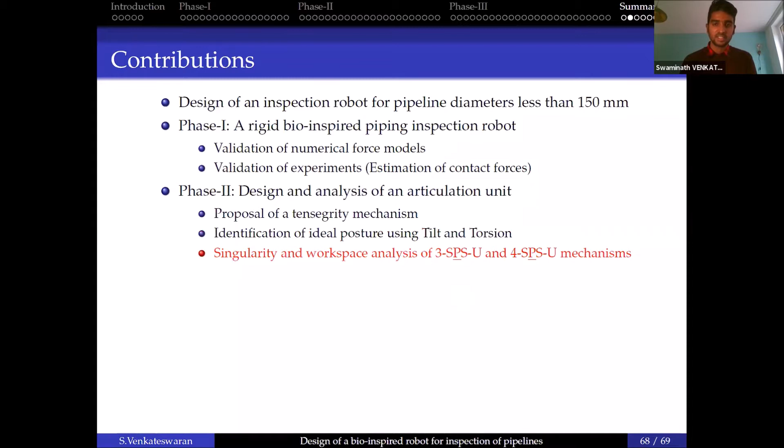The second phase concentrated on the design and analysis of an articulation unit in the form of a tensegrity mechanism, and also identification of ideal posture using an initial analysis that employed the theory of tilt and torsion. Singularity and workspace analysis were carried out for the 3 SPSU and 4 SPSU mechanisms to identify the tilt angles, and eventually stability analysis was carried out.

Phase 3 was split into two parts, where the first part concentrated on the experiments of actuation of a tensegrity 3 SPSU mechanism and solving the IKP for linear and circular trajectories, and also a PID controller for having a closed loop feedback system, and to find the regulated motor torques.

The second part concentrated on the design of a robot assembly by optimization approach through 2 problems, and simulation and rendering of the modules were done in MATLAB and CATIA to have an idea about how the system moves.

For future work, this thesis only addressed the initial issue associated with movement. The rest of the issues remain open, for example, accurate positioning or even inspection activities. This has to be validated by eventually building a prototype and testing it on an end application such as an industrial power plant pipeline.

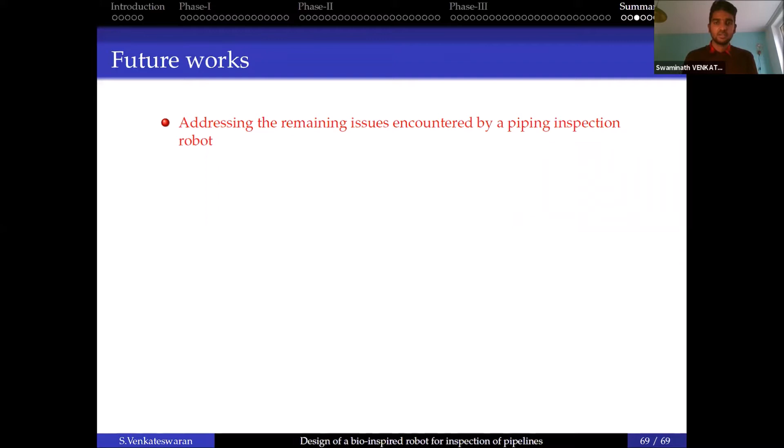And then the wrench feasible workspace for the tensegrity mechanisms must be studied, because this will give an idea about the forces during motion. Also, experiments will be carried out using high-speed motors to correlate numerical and experimental data.

Experimental validation should also be done on the 4-SPSU mechanism to understand its actuation strategies. And the analysis of stability must be done for the tensegrity mechanisms, because the zero free lengths were not taken into account. However, an analysis was already done in our latest research article by taking into account a value for the zero free length based on the spring sizing.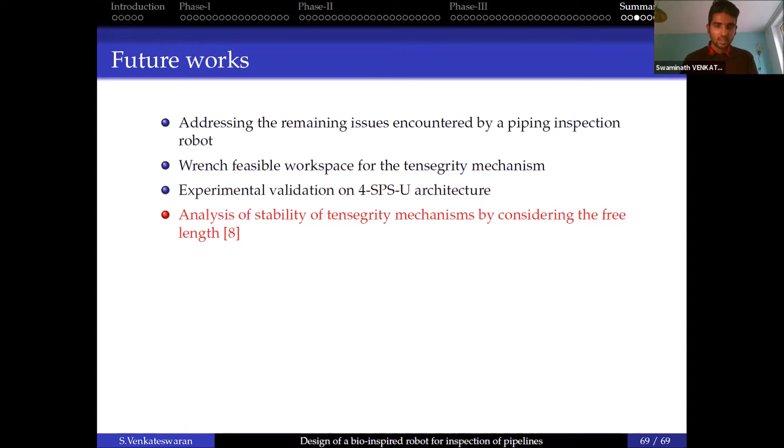The optimization approach was only done through a geometric approach. However, a simulation using software such as Adams must be done, because the dynamic parameters were not taken into account in the optimization problem. And eventually, upon validation, the prototyping will be done to test the robot inside a 90-degree pipe bend.

The 4-bar wheel mechanism was just proposed, but unfortunately it was not studied in the manuscript. So this has to be studied in detail in the future, because this mechanism will play an important role in assisting the robot to enter and exit pipe bends smoothly, especially when it comes to the end application. Accordingly, the optimization algorithm will be modified.

Alternate solutions could be considered over the existing DC motors, for example, a pneumatic artificial muscular system, because they are basically flexible, and they can even try to completely eliminate the use of DC motors along with tensegrity mechanisms. However, some feasibility check must be done, because these systems are sometimes not compatible with the radioactive environment, especially when tested inside nuclear power plant pipelines.

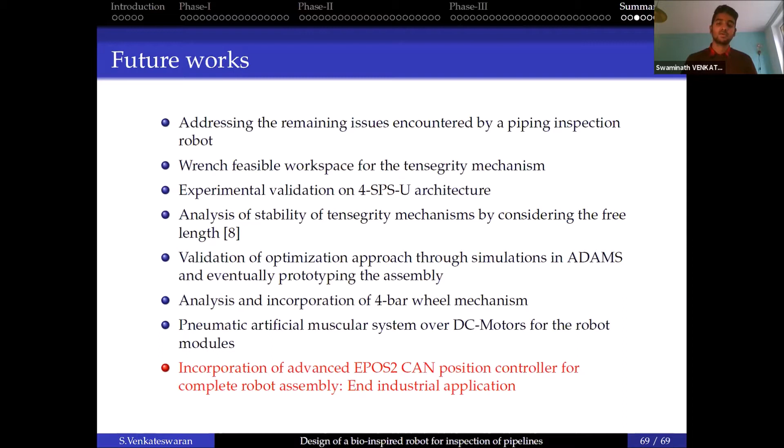At the moment, we were using separate microcomputers for actuation of the tensegrity mechanism and the bio-inspired robot. So when it comes to end application, it's not suitable, because it's not possible to operate them independently. So we should think of advanced EPOS2 CAN controller systems, which can potentially allow us to operate both mechanisms through a common central controller unit.

So thank you so much for your attention.

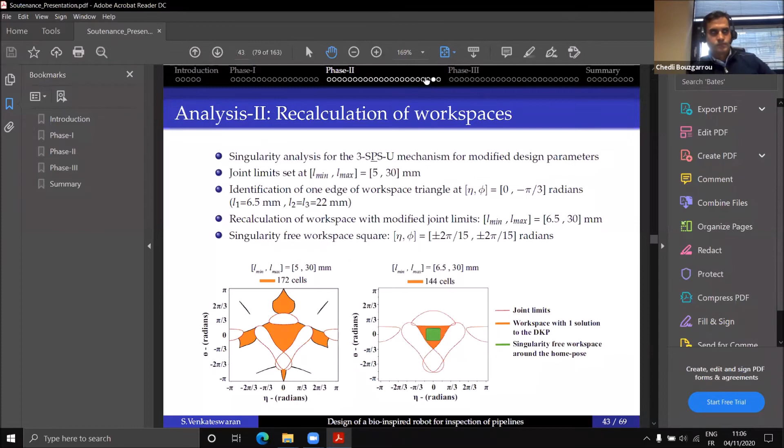Okay, okay. I have a question about the last simulation you showed. The MATLAB one? Yes, yes. Okay, I'll go there. Yes.

So here, how do you control the trajectory of the robot, how it evolves inside the pipe? As in, you're asking me how it actually moves? It's like a snake, but we have no change of length of the central joint, which should be used for it.

A remark I wasn't able to address during the presentation: this is not the real 6-step locomotion, which would involve the caterpillar-like front clamp. It was the idea to construct that at the end in MATLAB, but the main thing here is that we just have all the modules. We assume both leg mechanisms are completely declamped, and then the central module is also fully extended.

We have discretized points along the central line radius, and we just displace this entire assembly at each point to be sure that, especially at the pipe bends, there is no collision between the walls and the modules. So that's the main idea - it's not exactly the final robot simulation, just to have an overview that there's no collision between the modules given the dimensions identified. That's the main idea behind this small video.

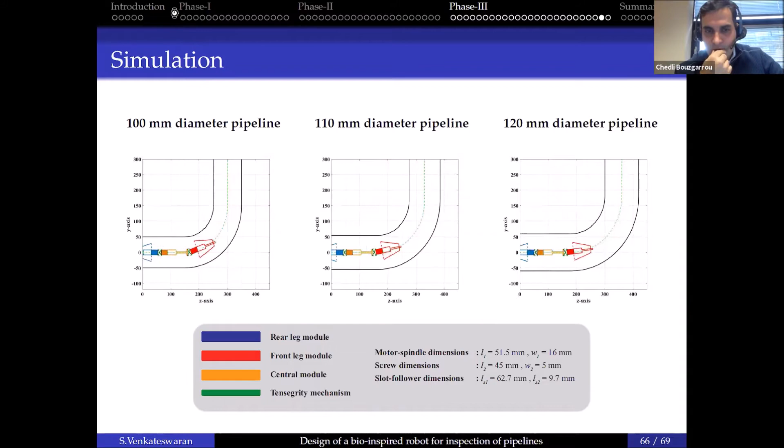Okay, thank you. I have a general question, I think my two last questions. It's for the first simulation you showed, but not simulation, the experimental validation of the robot without the universal joint. Could you please show it again? This one, the video probably. Well, yes, please.

So here we lift the contact. We have no contact, and when the module translates, in this configuration, I think we cannot control completely the robot because we lose the contact, because the contact with the pipe of the first leg or the leg in contact is not sufficient to maintain, like the simulation, the straight position of the robot.

So do you think we can change the contact conditions to control more precisely the path of the robot? As in, if I understand, maybe it's like when one end of the legs are clamped, the other end is free. Maybe you say that it's losing a lot of contact. Yeah, so if you close the leg, why?

Oh, and you lose the contact, and the module falls down, and that's one of the reasons we propose the 4-bar wheel mechanisms on the front and the rear - they ensure that there is at least one point contact between the robot and the walls of the pipeline. They also act as a support for the leg mechanisms.

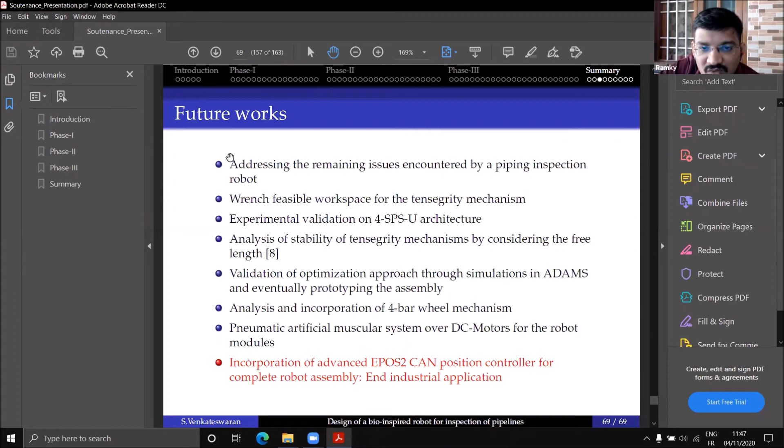In slide number 9, you mentioned multi-objective optimization. Did you find any trade-off situations there? Actually, I forgot to mention one point—this was also carried out initially when the robot model was proposed, done earlier by another candidate. This multi-objective optimization approach took into account minimizing the inverse kinematic problem and maximizing the force transmission factor, which is why we stuck with these dimensions for the initial design.

But the optimization approach presented in this manuscript, the second optimization problem, once again recalculates the dimensions of the leg mechanism, but through a single objective problem, using geometric equations instead of kinematic equations, to simplify the dimensions of the leg for the 100 to 120 mm pipelines.

Okay, and in slide number 20, you showed an experimental validation result—did you do any error analysis?

Because it's experimental data, generally if you do the experiments multiple times, you would get different values. So did you do any error analysis to represent, say, plus or minus, what percentage of error you could find there? For this experiment, I did not, because the experiments were carried out multiple times but there was some slight variation.

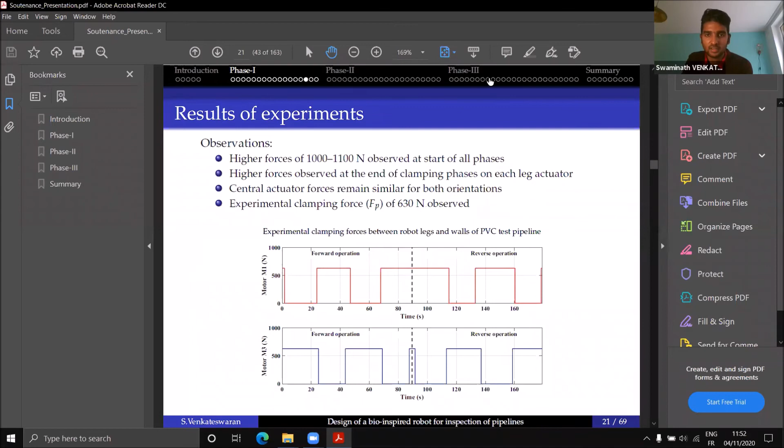I was quite interested to know how you brought about the circular trajectory shown in the video, since I could only see the linear trajectory. Do you want me to open the video for the circular trajectory? Yeah, okay, the circular trajectory. Yes.

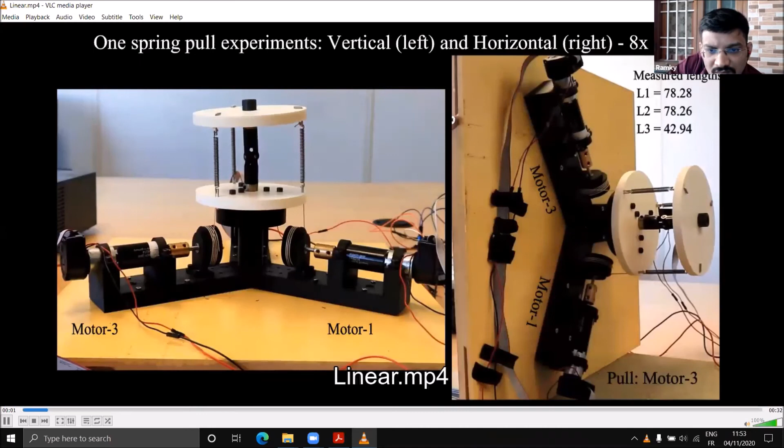This is the linear tilt. Okay, so initially we have a linear tilt, and then we apply the circular path.

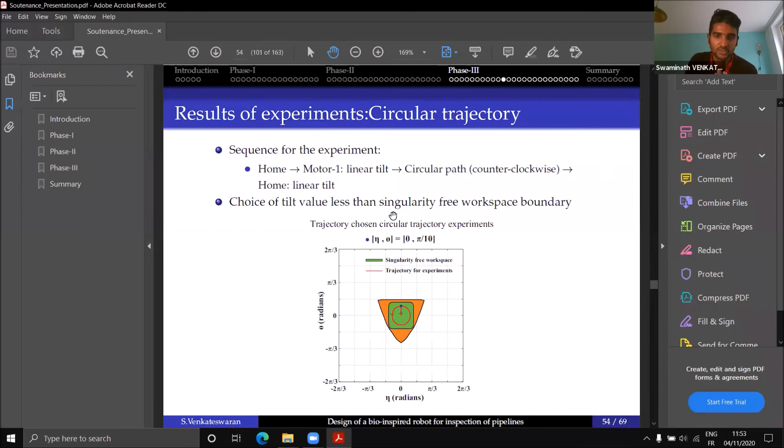Okay, so how did you bring this trajectory? It's quite interesting to know, it's very nice. It's just sinusoidal, sine and cosine terms. The equation was basically the equation of a circle, but in a bit of a complex form, which appears something like this.

So you needed circular interpolation on the kinematics, because there was another robot in our laboratory which also did a circular trajectory path. The paths, the geometric equations, were quite similar, but I had to remodify some things to arrive at this exact circular path. So initially I did some trial and error using MATLAB to arrive exactly at the profile of the circle, and then I transferred it to the control law in C to trace it.

So if you do real-time robot motion measurements, we will know the exact circular trajectory which is being developed, using a non-contact measurement.

No, but this was arrived upon literature of existing work done on another robot, and then I just did some manual tracing in MATLAB, and then, as I said, I transferred it.

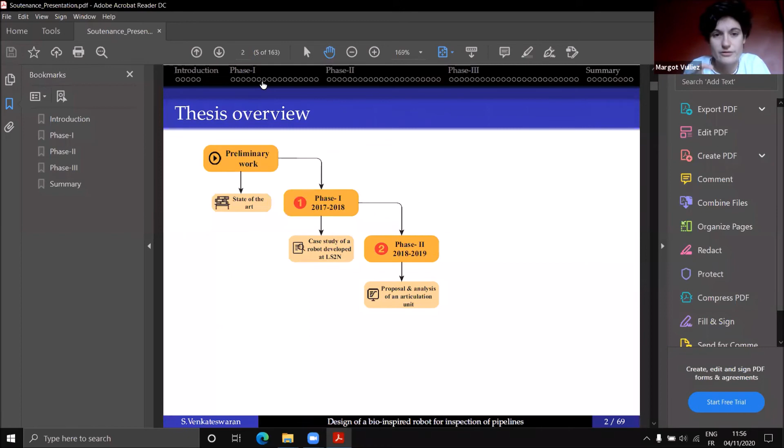I was pretty surprised that for the horizontal pipe you have something about 100 Newtons, while you have just 10 Newtons on the vertical pipe. But anyway, this difference is pretty surprising. That means the momentum creates a very important actuator force, you need a very important actuator force to compensate for the momentum.

But looking at the experimental video, we see that the robot is kind of tilting, and you explain this phenomenon by some flexibility of the robot joints. I'm not sure that this tilt of the robot originated from flexibility, I'm more expecting some slippage or rolling at the contact point. So my question is, could you consider this kind of slippage in your static model and anticipate this phenomenon?

So Margot, the thing is, you're right. When you have the clamping in one of the sets, the other end actually bends a lot, mainly due to the self weight of the robot. And so that's why in the static model, what we considered was that one end is fixed, the other end is free. And because of the gravity effects, we just consider that the self weight is imposing a moment on the clamped end. So that was the main assumption taken into the static model.

Not exactly slippage, I would say, but also the coefficient of friction was taken into account, not exactly for the experiments. To be honest, for the static model, the coefficient of friction was between a bronze material of the leg and a steel wall of the pipeline, but the experiment was actually carried out inside a PVC test tube, so maybe there was a lot of slippage. That's one thing, so maybe we should really try it inside a steel pipe and see.

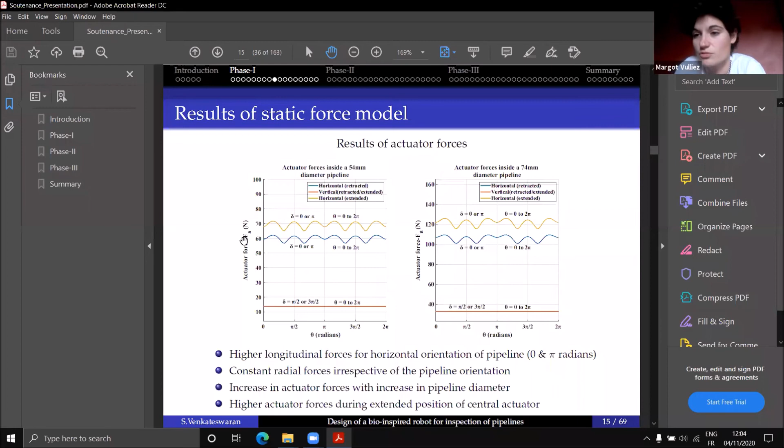So you were talking about a force control approach. From what I understand, you are controlling the voltage applied to your motor to clamp or declamp, so it's more like a velocity control where you look at a threshold, and when you reach a certain current threshold, you clamp your mechanism. Could you imagine a future controller that integrates wall force control at the leg tip, controlling motor torque to control the force applied to the wall, and then actively control the slippage of the leg on the wall?

The idea is not to go for a force control algorithm, because we were thinking of going for a position control, which was also presented briefly in the manuscript. We have two types of algorithm, force and position. The force control, through the current, regulates the torque to have the applied forces on the walls of the pipeline or actuation of the tensegrity mechanism.

But the idea is that maybe with position control, we can try, based on the encoder data of the motors used for the leg actuators, to create a link between the travel distance or displacement of the leg mechanisms till the distance at which it reaches the walls of the pipeline.

Because the problem with the force control algorithm is that we cannot predict the diameter of the pipeline, so we have to put some threshold limits. This threshold presented was highly limited to only one diameter range. For other diameters it's not going to hold good - maybe it's reduced or even higher, we never know.

So with a position control algorithm, we can try to create a relation between the leg travel distance and, based on the initial contact, understand 'I'm reaching this position' and cut off the velocity or stop the current flow to the motor and have the static phase. That's the main idea, and it also tries to eliminate the need for using thresholds in the entire system.

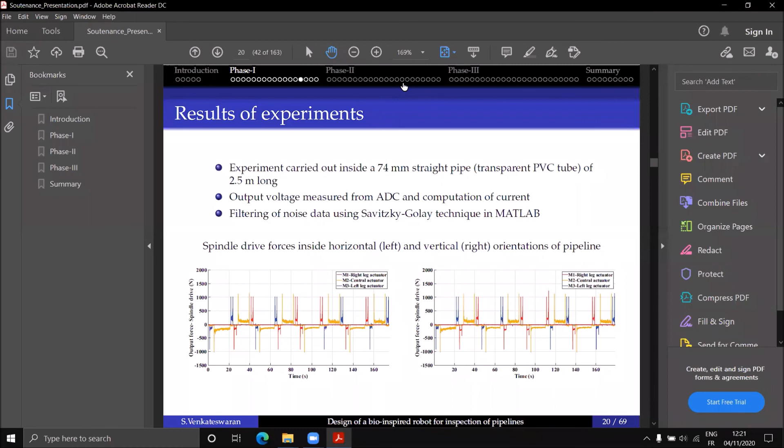Let's say in the case with 4 springs, I don't understand if you put the springs aligned with the axis, two by two, or if they are at 45 degrees from the axis of the universal joint. You mean the positioning? On the top view, you can see the U-joint and the axis, and the springs are located either aligned with the axis or at 45 degrees. Have you tested both of them?

I have the impression they are aligned with the axis of the U-joint, kind of parallel with the axis of the center. At the home position, yes, it's parallel. Why this choice instead of turning them off by 45 degrees? So basically the geometric arrangement is like, for example in the case of 3 SPSU, even at the home position all the springs are parallel along the axis of the universal joint, and following the circular law, we have a spacing of 120 degrees between each spring.

You did not optimize the position of the spring by rotating the springs regarding the universal joint. You already say that that's the best position. Yeah, kind of. But the thing is, when it comes to the final assembly with the robot, this mechanism can have any orientation. For example, if we have the planar projection, we can see two springs parallel to the orthographic projection, or we can have another orientation where the two springs are not exactly at the orthographic projection, but at some angle. So it's purely affected by the orientation of the mechanism about its own axis.

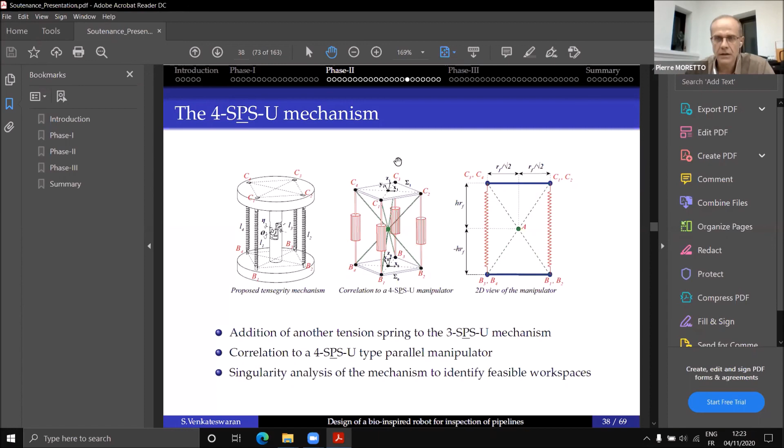As your title mentioned, a bio-inspired robot, I would like to do a short comeback to biology, because I think the link between robots as a mechanical demonstrator is really interesting to understand the biological functions. You demonstrated that with 3 or 4 units, you obtained approximately the same capacity or mobility, except in terms of speed. I think the four-component system is more interesting for biologists, because it is the equivalent of four muscle groups corresponding to front, back, and both sides. And we may have some interesting cooperation to do between the two systems.

And I had a question, because I don't really understand if your algorithm and equation integrate weight. So is your robot able to locate itself regarding the gravity? As in, is the robot able to adjust itself or something?

Yes, because when you're looking at animals, they don't act in a similar pattern if they are working or moving against gravity or with gravity or on the horizontal plane. So my question is, when your algorithm integrates weight, is it expected that the coordination or synchronization of the actuator enables the system to move differently depending on whether it's moving against or with gravity?